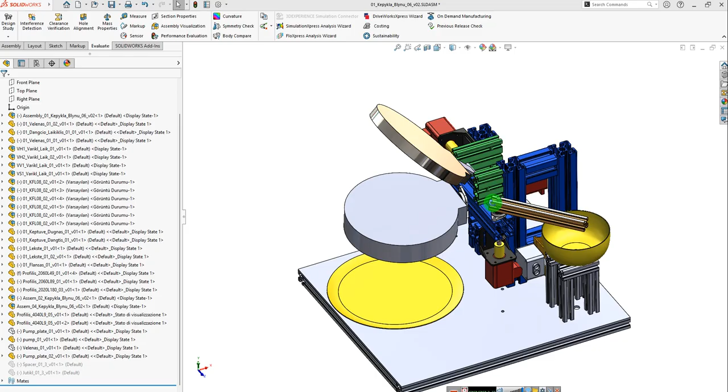So now we need to start from the very beginning the 3D model project for pancake baking. It means you have this mechanism, and automatically it should be closing by itself, automatically switching this position, and here the harness going to the pump, the mass into the bottom part, and the mechanism goes back, closing, baking for a particular time, opening, rotating, and placing on the table. So this should all be going automatically.

A similar model was done before, but it had a very bad view. So 2 months ago I started this project, and from the start we need to prepare a better view. It means everything from aluminum profiles.

So the question is how we need to solve it. Everything is connected with special connectors, here you can see it's simple. The motors here - I'll use another one in 2 weeks for the full design.

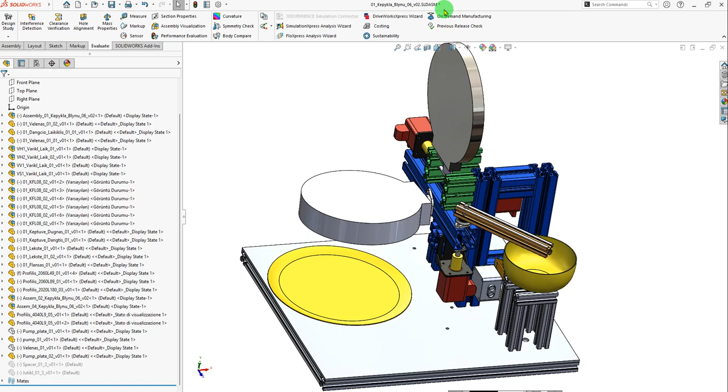So if we're measuring, this will be 20 by 20 millimeters, and the size of the plate, if you open the plate, is 400 by 450 millimeters. So that means we can start a new part.

For the beginning, creating the plate. Example, choosing the top plane, click to the sketch, and we could draw the form like this four edges, rectangle, and place the measurements directly.

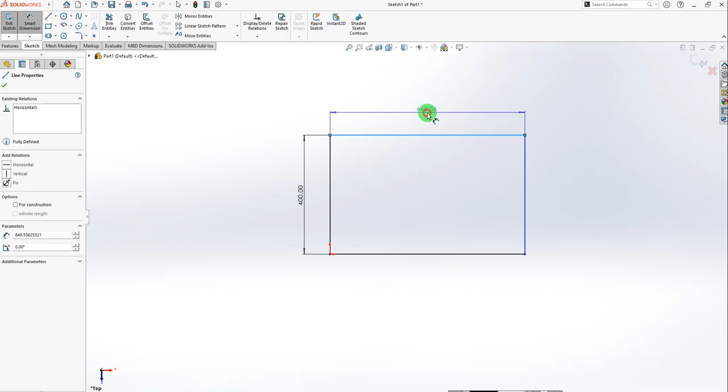So placing the left side, 400 millimeters, 400 and enter, placing the second one, 450 millimeters.

So this starts the sketch, and now we need to do some thickness, extruding, and a good thickness is 3 millimeters for the aluminum plate.

So now you see this plate, and now we're saving it with a new name - we're starting from the very beginning. Okay, Plate 01. Next, we need to add the aluminum profiles, 20 by 20, at the bottom side.

So for creating the plane, for creating the sketch, we need some time for that. If you look into how it looks, but we could do something else.

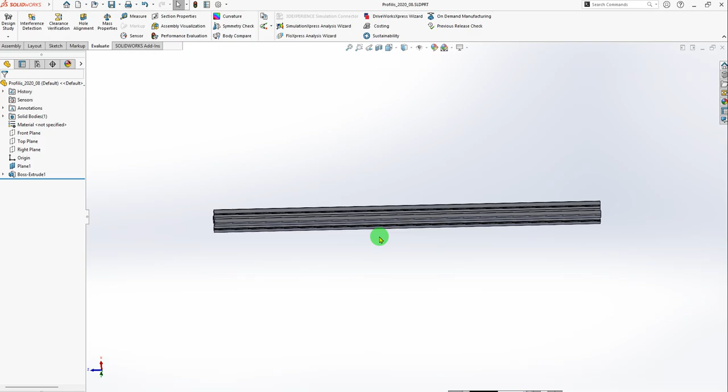Example, if we're opening this file, opening the sketch, how it looks - you see I need some time for drawing it, but it's not necessary if I can find this sketch somewhere on the internet.

And now directly we're trying to find it, opening the internet browser and searching. I know that it's profile 2020, and it's made from aluminum. And of course I need a SolidWorks drawing, so trying to search for it.

So SolidWorks and download. Searching where we could find it - maybe here, maybe here. So aluminum now, okay, trying to search. GrabCAD, yeah, I use this sometimes.

So the similar profile will be faster if I download it directly - I could connect. Okay, go to the library and search. Example, profile 2020, 20 by the x-axis 20 millimeters, and by the y-axis 20 millimeters, 20 by 20.

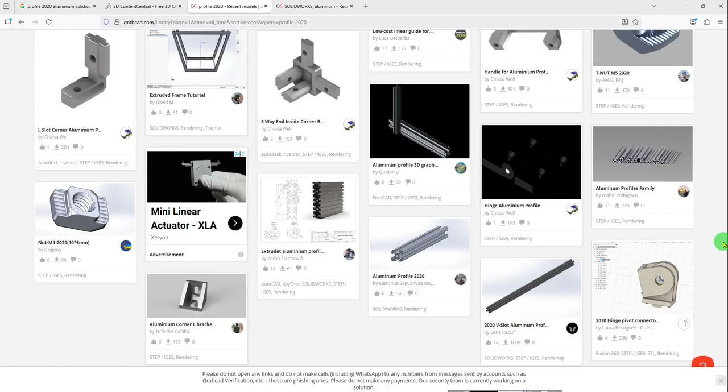So now we can find it. There are different holders for this profile, and we could search directly for this profile, aluminum profile 2020, for example. Oh good, it is enough.

And we need to check if the format is designated for SolidWorks. SLDPRT, it means for SolidWorks. Click to download. Preparing, waiting some time, and it downloads. Okay, we open this now.

File - I'm going to this place to put it, now unzipping, and we have this file. Now we need to open this file in the SolidWorks software.

Closing the old document and opening this part. Okay, I have the aluminum profile on this - opening directly.

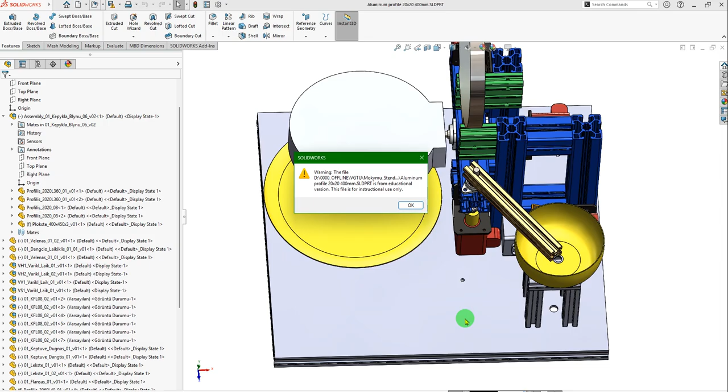It shows that it's made with the educational version. So now we see that we have this profile, and if we look at how it's drawn, it started with this form, after cut it, fill it, and cut it, and so on, and at the end you have this profile.

So the best choice is if we save or name this under another name - that's better for us. And we could save it, for example, as bottom 2020 01.

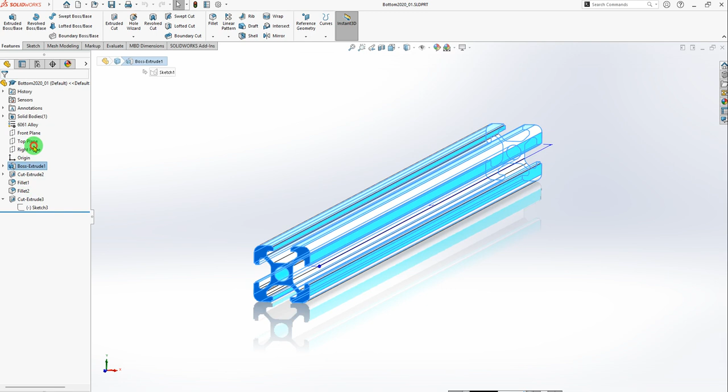Now we need to check the length - this could be the full length. We have 450, the biggest one, length, and we could change the length by our needs, to 450. Assign it and save. So now we have the plate and created the part for the bottom, the bigger length.

So what's next? We need to create the assembly file - make assembly.

So now if we open it, this two parts here, you could click on the left side on the menu and place somewhere inside the assembly file. So we have one part. We need to add another part. Insert components, click to assembly, insert components, and choosing the bottom 2020 and 01. Click here and place it.

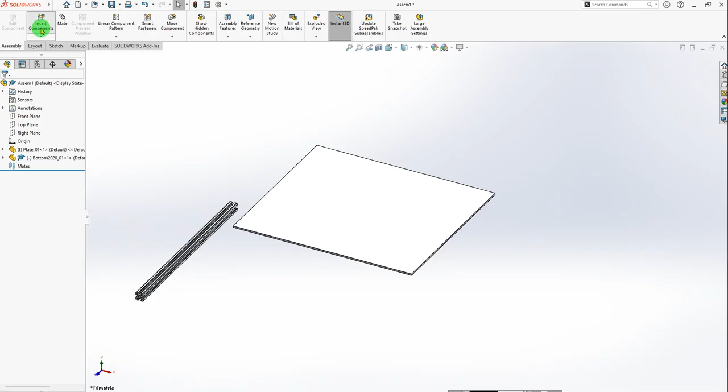But we need to add another one. Insert component, bottom, and we have double this part. Good, we place it here.

Now we could save in this file. This file is assembly file. You can name, okay, assembly 01 in the same catalog. That's okay. Change the name. Rename the assembly 01.

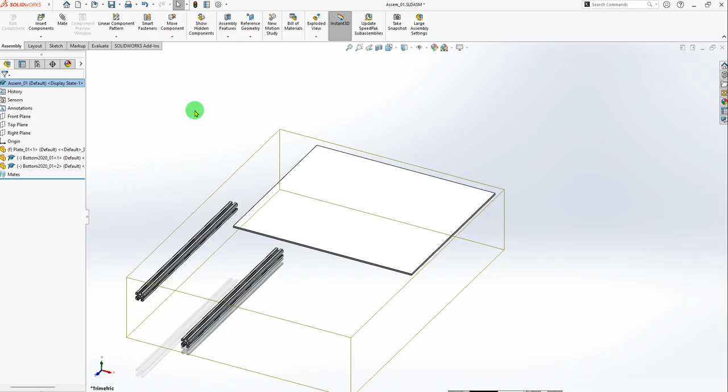So now we need to doing the mates between these parts, and for the beginning we need to click to assembly menu and mate. So now we can choose the bottom part of this plate and top part of this element.

And if we rotating, you see that it's good matching, and we agree. The next it is we need to doing the same with this part, but we could now creating the mates with this. This should correspond the mate to this. Maybe both are here, yes. Good.

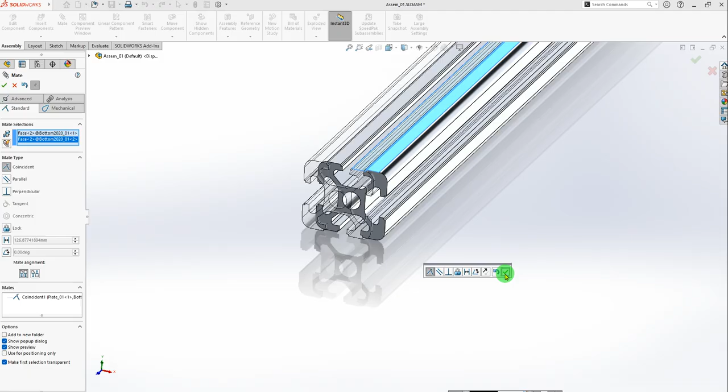And now if we moving one element, as you see, it could be moved. And yes? Why do you make specifically those areas that you pressed? Or is there no difference? Can you just choose whatever area?

No difference. It means you could mating here, this plate side, yeah, you means with this, or separately this, yeah, about that. Yeah, this is not so important, but mostly the same parts I doing. Well, if I need to moving in the future, I need to moving all these parts together. It's better for me. While to outside element, like to the plate, it is only one link, only one mate is done with this.

And I don't need to cutting or breaking the mates with this if I need moving both parts. It's better for me. So now I need doing some rotations and doing another mates. For each part, we need to doing 3 mates always in 3 axes. Choosing another one mate.

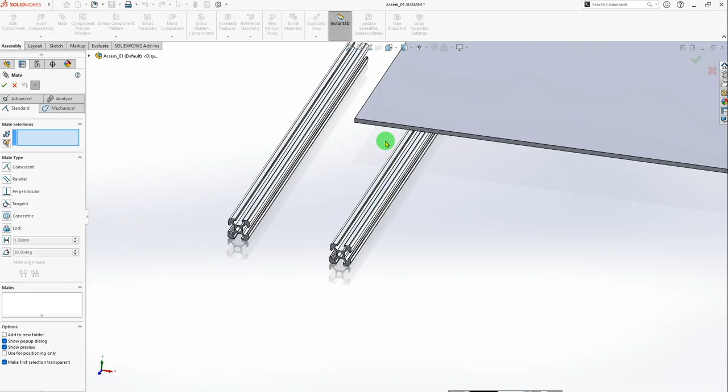And you could mating this side and here, this side of these 2 parts. Increasing, I click to this surface and this. And checking. Is that good or not? So you see, it's good or not. From my viewpoint, it's bad.

I need to rotate it 180 degrees, and well, I choose it this, and this should be on the bottom part. I need to change it, means mate alignment. I click to here, and it changes. So it changes now, and now it's much better. So I agree with this.

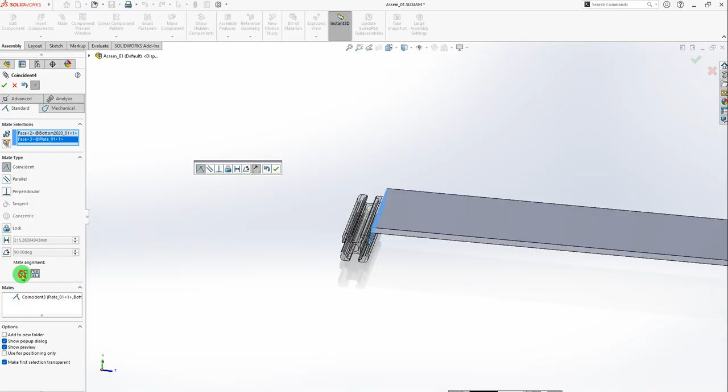The next, I need to do the same with this. And of course, I'm mating these elements between this and this together. But okay, now I could do like this and checking is good or not. Not. I need to change the alignment. So now it's good, the alignment.

I agree with this. And now, if I can move it, so but I need fixing. So I can't move sides, I can't move to the top and down, but I need mate this surface and this surface. So looks good. I agree with this.

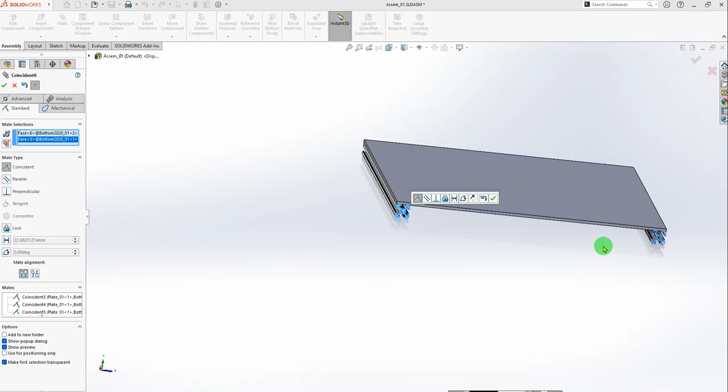The similar I can do here, mating this and this. And now checking everything is good. So the next I need to add another one, but with particular length. And length will be another, not 400. Well, full edge is 400, and we need excluding this and this length.

Okay, if we know the precise measurements, like 20 and 20, it's okay, we could calculate, but sometimes we need to measure the distance between 2 parts, and I show how it will be better to do. Need to click to evaluate, click to measuring, and choose the surfaces between I need to measure it. This surface,

click with middle mouse button, rotating this part until I can see another surface with the wheel increasing, decreasing, and click to this surface. So now I see the dimension, the measurement, and distance is 360 millimeters. So this length I need to create another part.

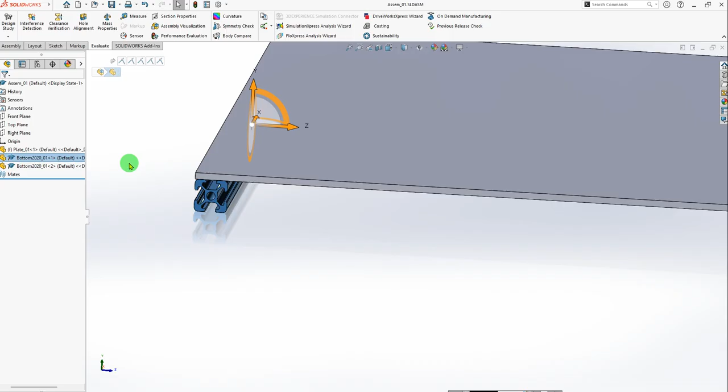Okay. Now I could open this part, click to this element, or I can click here and opening it. I open it. What's next? If I changing the length here, directly changes in the assembly file, the first part.

But I need to saving under another name. And example, I saving, and the SolidWorks ask, I need save this document, I need doing copy and continuing with this drawing, or I doing the copy and open new one part. Mostly I doing the last one.

Click to the third one option, and now I change the name. Example 02, and click to assign. It saves.

So now the question is whether I need to keep the old document or close it. Of course, I need to close it. I don't need the old document anymore, and I leave only the new one.

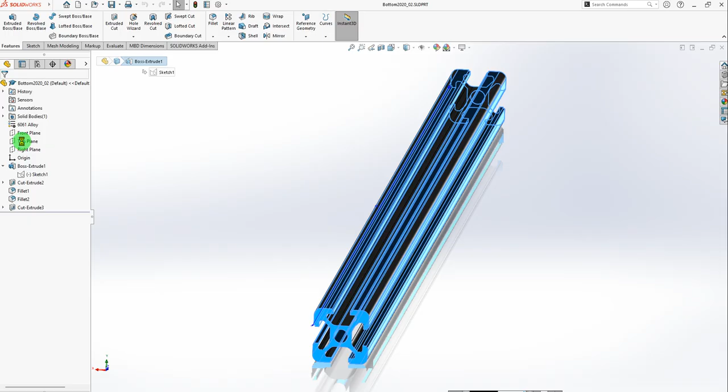Shorter. Now I could save it and open the assembly.

I need to place two elements with another edge. Click to the assembly menu, insert components, and the second one, part of the 2020 profile. Click one more time here, and I could open it again, or do it another way - not clicking insert components, but simply copying the same part. Click here, Ctrl C, Ctrl V. So it's done - second one, in the same place.

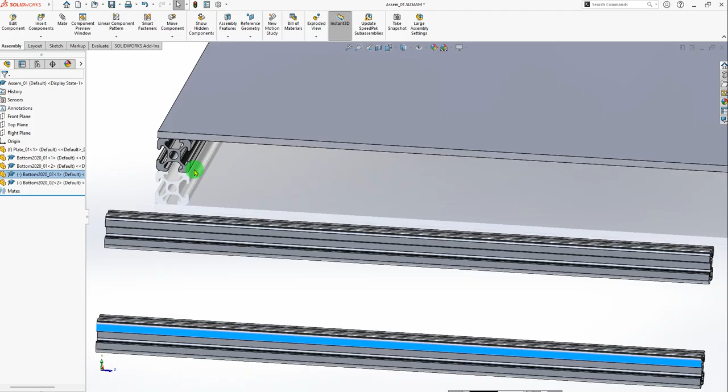If I click here and move, you could see these are two separated parts. If I try to move this element, I can't move it. If I try to move this part, I can. If I try to move this plate, I can't move it. Why not?

The first plate, the first part that I place into the assembly file, is fixed automatically. If you see the letter F here at the very beginning before the name, this means it's fixed by the coordinate system. If I click on this with the right mouse button, I have an additional menu, and I could change the fixation to float. I click float, the F letter disappears, and now I can move all these parts together. So this is very simple.

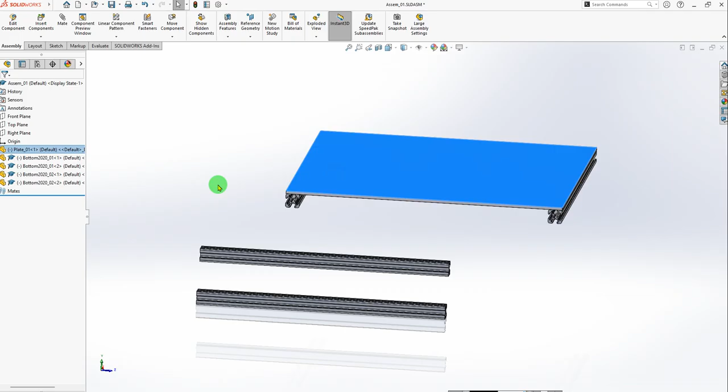If you're placing another element, you could fix everything instead. For example, if you fix this element, when mating, all parts will be rotated around this part only. This part is fixed, I can't move it. But it's not so important at the beginning. Mostly I do the main part, like the plate, with fixation - fixing it. But of course I need to remove the fixation here, float.

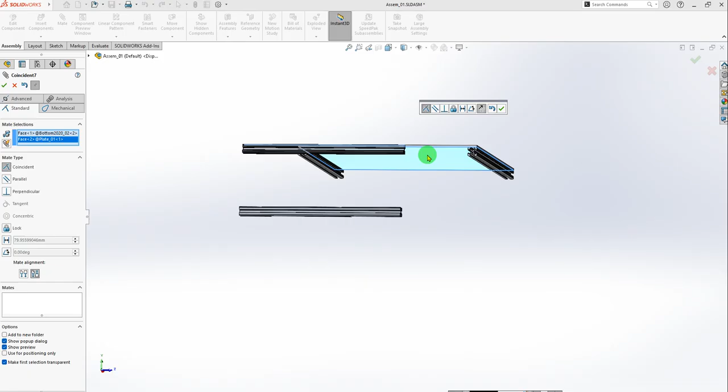So now we're trying to mate these parts. Click to mate. I click one surface of this part with the middle mouse button, change the angle, and mate it with a second surface, mating here. Then I need to check if it's good or not.

Looks good. I agree here or here - it's the same, automatically it's empty, new one. I click here and click here. Sign it. Good. Now I need to...

Create this - I need to choose this surface and this surface. So it's made here, and the last one I need to make this surface with this surface. So now I have a good connection here.

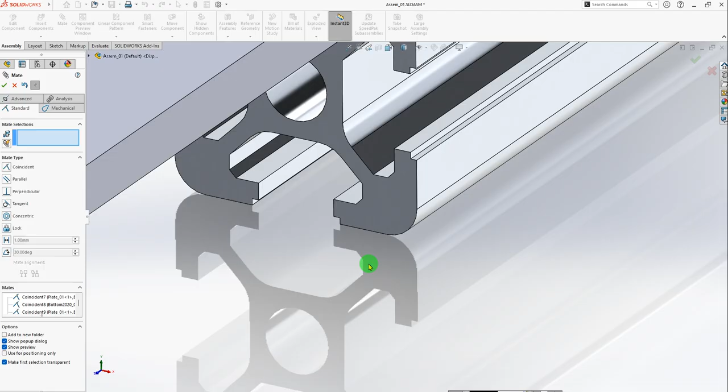I need to place the fourth element doing the same thing. For example, click this surface and this surface. It's placed here. Good, I agree with this, and increase the scale of this surface.

So now we've done the first assembly, but it's only the plate. We need to create another assembly, or place other elements on the same assembly. If we open the old project, we could start with the bigger profiles, 40 by 40.

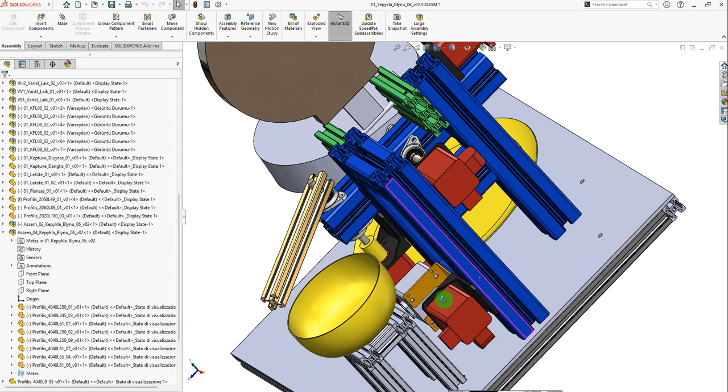You need to find this profile on the internet at the beginning. So we try to search for it. Profile 4040, click this. Oh, there are a lot of elements. But we could download it.

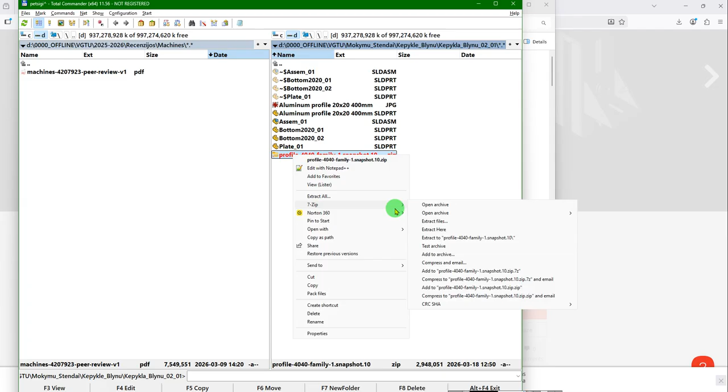Place it in our catalog. Extracting it. And we need to open it and find which part is the right one. We open it through SolidWorks. Click Control O, opening it, and look - so this is good.

This is the one we need to use. Opening it. So we have the profile. Now we need to save it under a new name in our catalog.

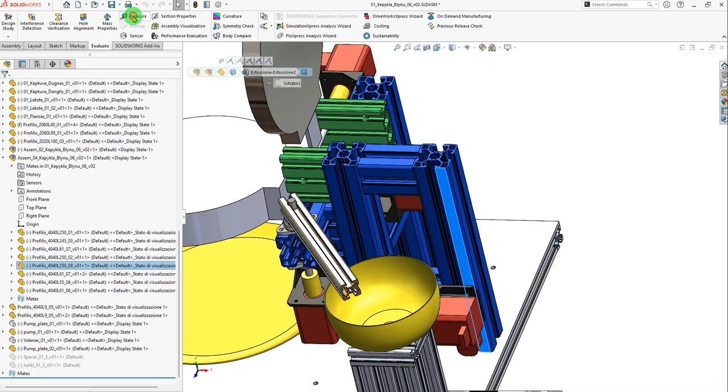Point zero one. So now we need to know the length. This length is, remember, 250 millimeters. We need to measure it - it should show only area and perimeter, but if we click on one edge, for example, it should show the length, 250 millimeters. Good.

Open with Control and Tab another file, and we change the length of this. Click on this element, edit feature, and add the length 250 millimeters. Signing it and saving.

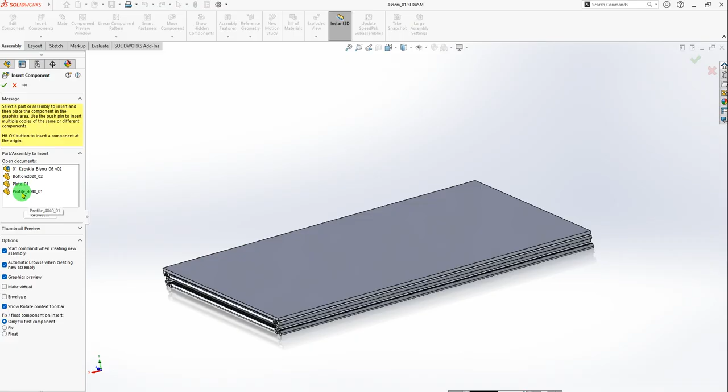So now we open the new assembly, and we need to place it. Assembly, insert component, and the profile 4040. Place here.

What's next? We need to know the place where we need to place it, under this table, on the top of this table. So we need to know the measurements. For the first try, we could click the simple two mates at the beginning, or only one, and after that we need to add another two.

So now we could create the mate, this table part, this surface. Checking, good. And now we could move in this position, but it's always attached to here.

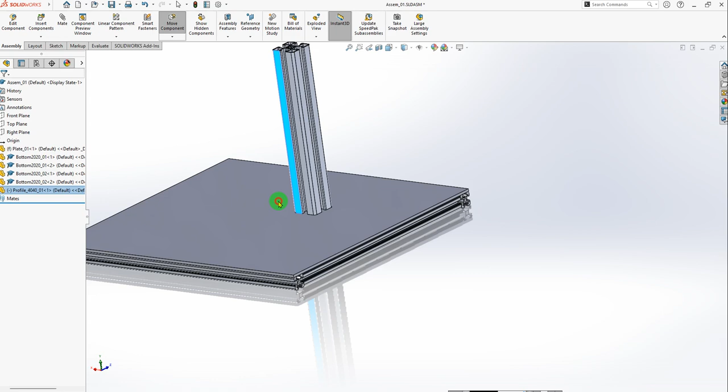That's okay. I click to escape. So now it's good, assigning it. So if I'm moving it, it moves here, but it's always touching this surface.

Good. What's next? I need to place something. For that purpose, the best choice is if I open this plate and place the hole. So the hole in this plate.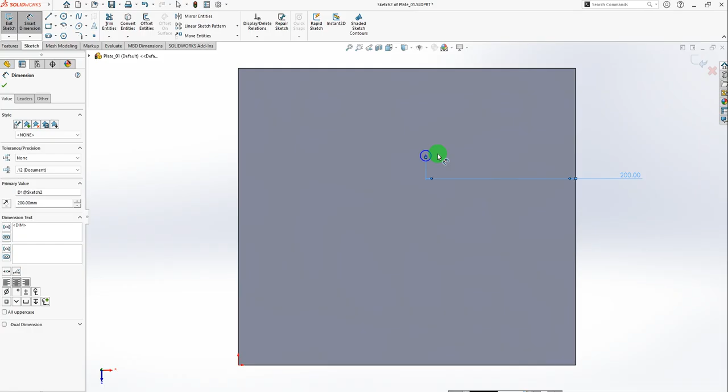Example, I click to the sketch, choose this surface, and place somewhere the hole. It's not matching which diameter we have, but we need to measure here the measurements, adding measurement example 200, and example here 100.

So good, now we can click to the feature and click to extruded cut. So now we could see the feature, and the best choice is if we click to the hole, doing this hole and cutting. So it appears good.

Opening back the assembly, we see here. So it's not okay. I need to see where is the 400, where is 450 millimeters. So we know that 450 millimeters is this element, but I need to change the place.

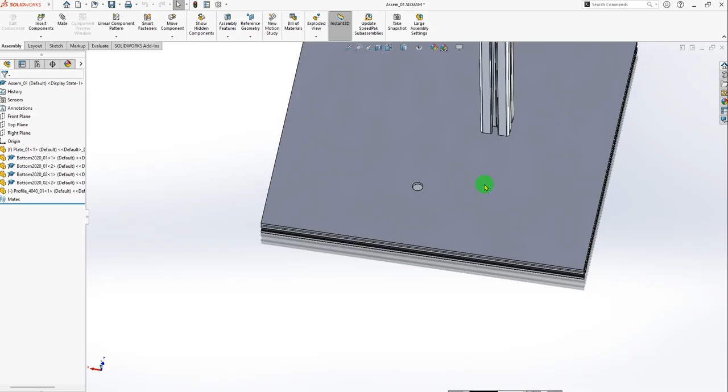It means I need to move somewhere here, and starting from, if we open this, so this is somewhere here, but the place we could check. Click to evaluate, measuring, click here and click here, this edge, and now it shows 179 millimeters.

Okay, we could do 180 millimeters, 1 millimeter is not important. But we see that we need to change from this edge 180 millimeters here, and need to change the measurement maybe from here up to here.

After, so go back, opening this arrow, the sketch, click to sketch, click to edit sketch, and we need to change the position. We're placing at the beginning 180 millimeters. Good.

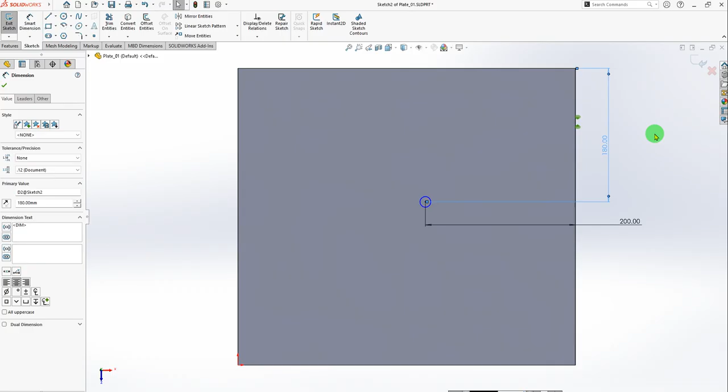What's next? Checking it. So now good, but we need to go to this position, and we need to measure it. Again, we measure it from this surface up to this surface.

We have distance 111, and of course we could reduce 1 millimeter, and it will be 110 millimeters.

Okay, opening this part, and we need to place not here, not there, but we need from this side. It's rotated 110 millimeters.

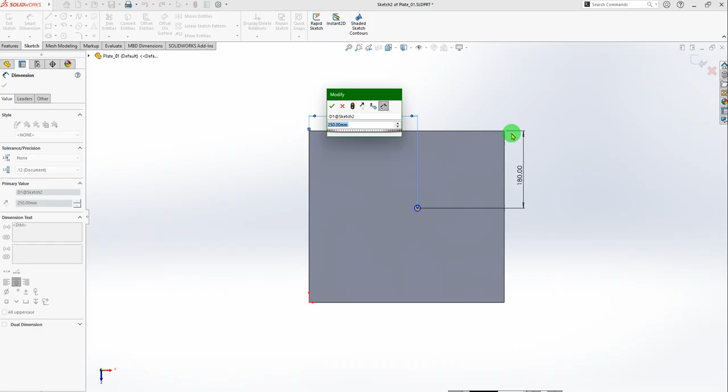Okay, exit sketch, save it, opening this. So now it's much better.

Good. What's next? We can place into this hole position the matching or the axial position of this element. If we have here a circular element, it's the best choice. Okay, we could check it.

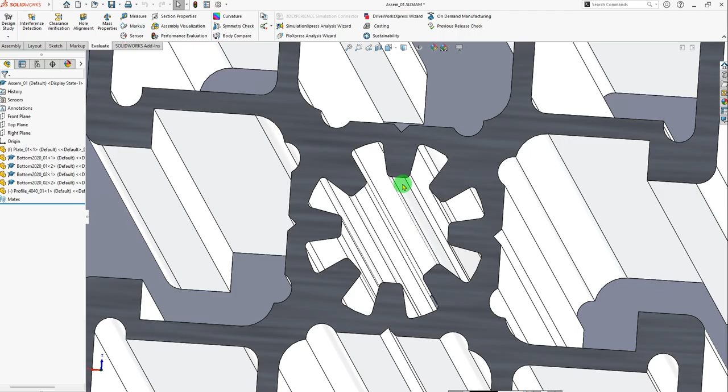Yes. And then you change the hole dimensions for the resource? Yes, it also moves the part, the position changes. If we change the position on the plate, this hole, I will show to you.

Okay, so now we're trying to mate it. We don't know exactly if we have the circular element here inside or not. We don't know that. Looks like circular, but it's not clear now.

So we could check. Simply click to the assembly, mate, click to the hole here, and try to click somewhere here where it has a circular surface. If you see that concentric assigns automatically the mate, it means this is a circular surface, and it's very well done.

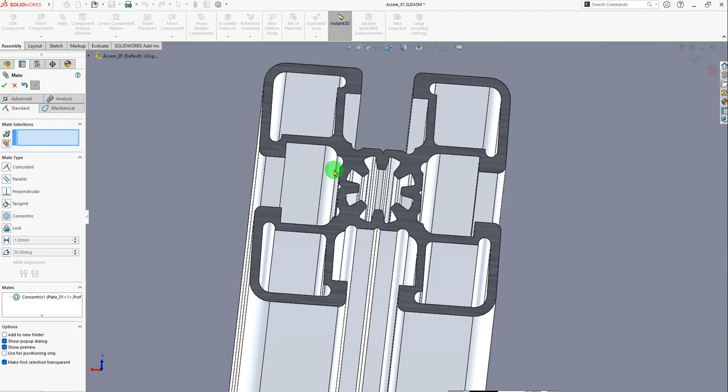Good, I could assign it. So now you could see that in the same position that we need, it's placed, but we could rotate under this axis.

How? Change it. So we need to mate the surface. The third mate we need to do for this, while we have only two mates before. We have the cylindrical to this axis, to this hole, and we have on this plate the bottom part of this profile.

Now we need to add the third one. Third projection, third mate. How are we doing that? We are choosing this surface example and this surface. And what happens if we click to coincident?

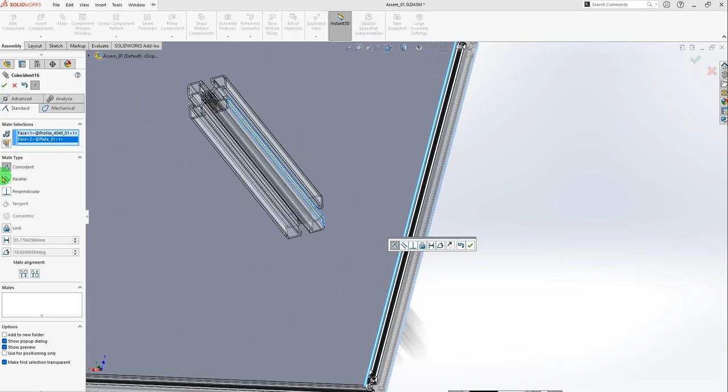We have the error. Well, we have placed the mates in this hole. But automatically the system chooses it parallel. I agree with this choice, and we could assign it.

Now we can't rotate, but we can move. Good, save it. What happens if we change the position? Of course, I see this is too small a position. I need to move to the left side if we open the older one.

No, sorry. I measured, especially from this surface up to this surface. This is the simplest example to measure. It's much more difficult to measure the average, the middle position of this.

I don't have the middle element, but I know the measurements. I measured between this surface and this surface, and placed the hole between this surface and this surface. And I need to add 20 millimeters to this position, 20 millimeters to this position, to the center.

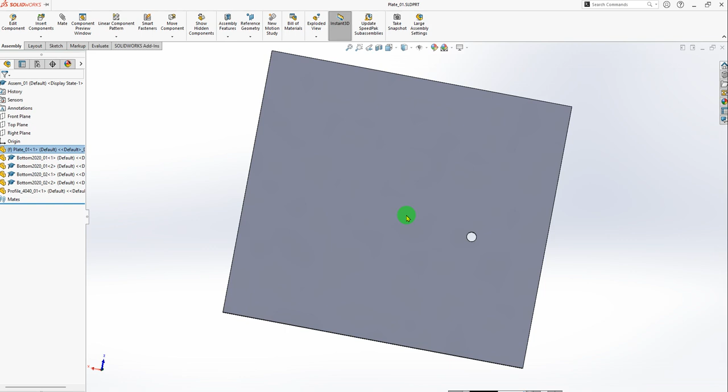Now I could open this plate and try to add 20 millimeters. How could I do that? Changing to 130, yes? Good. But it's another question - one time I'm changing like this.

130 millimeters, click enter, so it changes the distance. Next, I saw I need to add additional 20 millimeters, but click 2 times to this element, and I could add 200 millimeters here, changing it, or I can do the mathematical function, plus 20, and click enter. It automatically calculates.

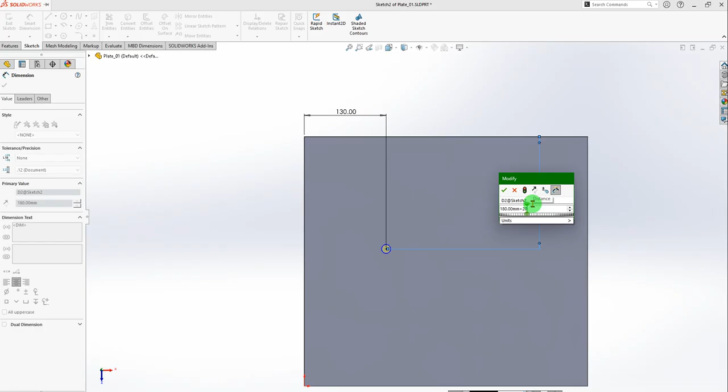This is important, sometimes it's difficult to remember if you have 4 or 5 numbers in the value. Or sometimes you need to divide by 2, multiply by 2. You need to care about it and calculate very precisely. The best choice is you could add elements - plus, minus, divide, multiply, and so on - and assign it.

Good, now exit from this part, go back to the assembly, and it automatically moved. This part moved 20 millimeters to the left, 20 millimeters up, by this picture. So good, next we need to add 2 additional elements.

We need to check if it's the same length or not. Of course, this is the same length. We could see this and this additional. Now we placed this part, and we need to add this and this. But it's the same length, it means it's the same part I could add.

Ctrl C, Ctrl V, and again Ctrl C, Ctrl V. I have 3 parts. But all these 3 parts are in the same place.

If I don't know how many parts are here, sometimes not just by clicking Ctrl C, Ctrl V, copy, paste - but sometimes if I'm inserting components, placing them, for example, 2,000 or 30,000 millimeters away from this part, I don't see the part.

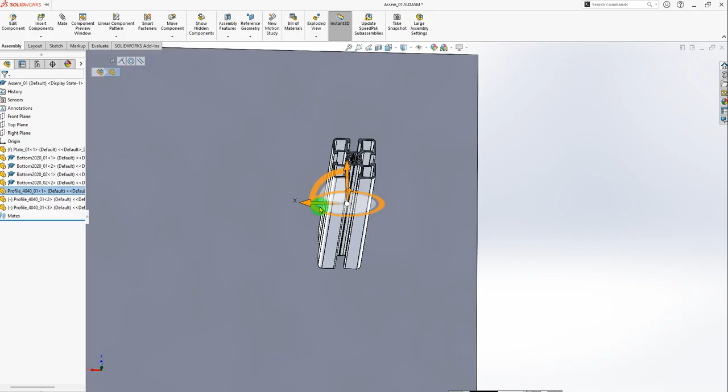In SolidWorks, there is one beautiful button, F. If I click the F button, it automatically shows all parts in one window.

The part marked here, I could move by these arrows. Here, that direction. And the example I showed you - if I move this part somewhere here, and I don't know where the part is placed, I see this part is here, the center.

Click here, I don't see anything. Of course, I can increase or decrease, but the best choice is to click F and show the part. This - all parts shown on one screen. And I can move. It's easier to recognize and understand.

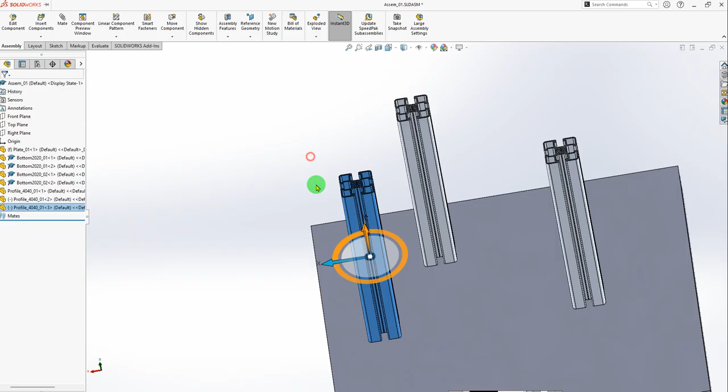You change the position, the height. Click this part, I see the positions changing. So I have 3 parts.

Good, now I need to place 2 parts here, but I need to measure the distances. Now we could click evaluate, measuring, and measure this and this distance. And I see a few measurements.

Normal distance 61 millimeters. Good. By x-axis, by z-axis, by y-axis - it shows everything. Good. So it means 61 millimeters. Good.

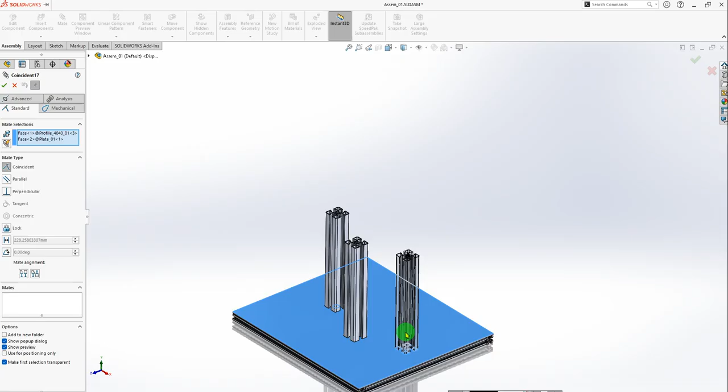Now I'm rotating it, and I need to place it 61 millimeters away. Assemble, mate. At the beginning I place it on top of this surface, mating this and this. Assign it. Now I can mate this and this.

Not this, false. Where is my... I can move this, I can move this, but I can't move this. This is placed fully. Okay, I need to rotate, maybe for better understanding, to mate directly with this picture.

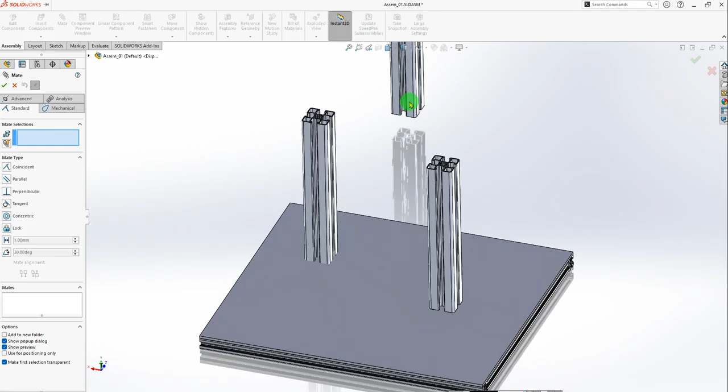So, okay, let's do the next point. This I could move somewhere, but I'm doing the mate. This and this mate. Good.

Next, if it's placed, for example, one onto another part, it's difficult to know which part is placed and which is not. But the best choice is if I click here on the left menu and see the arrows, I can try to move it. I click this - not this, I need.

I click this - to this, you see 2 parts are in the same place. But I don't know which is placed, which is not. I try to move it. I can do it. Good.

It means this isn't the part I need. I need this part, okay, this part. I try to move it - yes, it moves. And now I have the mates.

How many mates do I have? 1 or 2 of this part. If you don't know, we need to open the list. Click on this element here or this element here, and click view mates.

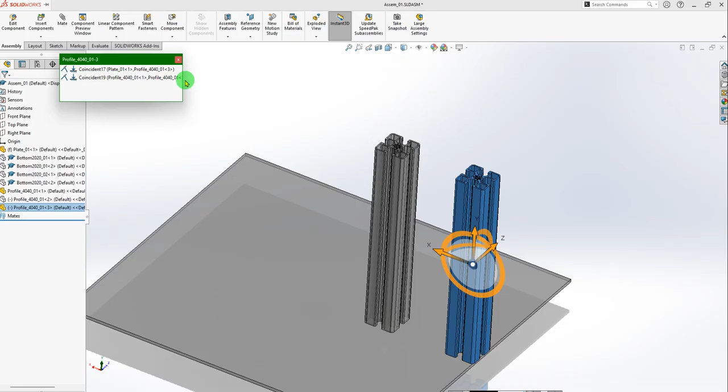And I see now we have 2 mates. Simply moving the arrow to the cursor, I see that the pictures show this bottom surface of this profile is mated with this. You see the different colors. And I move to another one, it is mated here. This is good, it means I have 2 mates.

And I need to do the last one mate, between this and this inside. Click here to the distance and write 61 millimeter. And assign it.

So now I could check. If I open view mates, I see 3 mates: coincident, coincident, and distance. And it shows between what parts the mates are placed.

Good. The next, what I can do, I can place this element parallel to this surface, and I need to know only the distance. The distance we could measure. Click to evaluate, measuring between this and this surface, and we see 71 millimeter. Good. Click to escape.

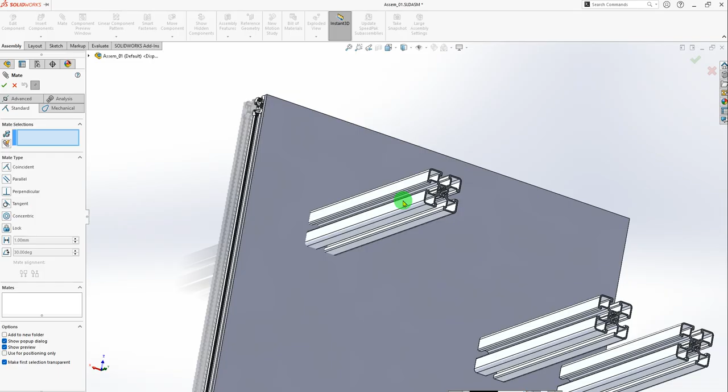Reopening the older documents, and click to assembly, mating, and now mating this surface and this surface. It's good made. If it happens that mate is not so, but like this, it means you need to change the mate alignment. It could happen, about 50% don't match the alignment, while the system automatically should.

Good. Now we assign it, and we need to move this part. Click to this part, move part, and we need to add the distance between this and this surface, 71 millimeter. Click to distance and 71, enter.

Good. And how many mates we have here? This profile, 1, 2, or 3. If we try to move it, we could understand that it is not fully mated.

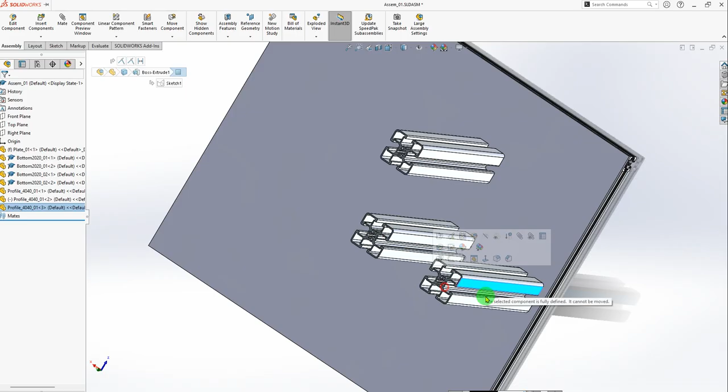If I try to move this, I can do it. If I try to move this, I can do it. Try to move this, and so on. The best way of checking the mating elements is to try to move it. Click with left mouse button and try to move. I can do that. Good, it means I need to do the mates.

Now I need mating the bottom surface of this profile with this plate. Okay, click to mate, click to this surface, and how can I catch this?

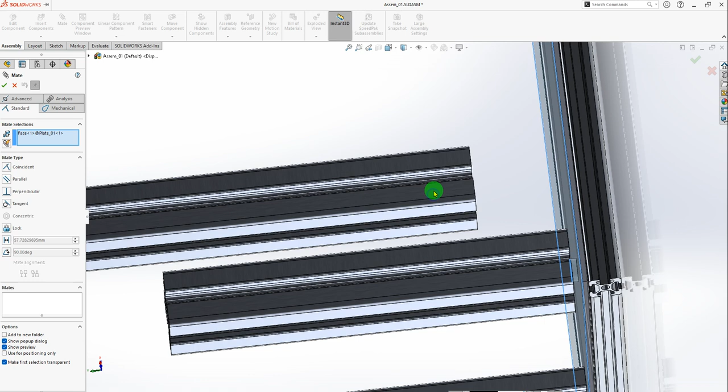If I don't see if it is inside placed, I can move this part. I can click with this element, so, and I could check, try to move it with the right mouse click. I can move this part, and I need to choose increase the scale and click to the surface and check it. Good.

Now we positioned well these 3 elements. The next, what we need to add inside here: 2 elements, the same length, on the very top and not at the very bottom, but at some distance. We need to create 2 parts with the same length, and the length was 61 millimeter between these 2 surfaces.

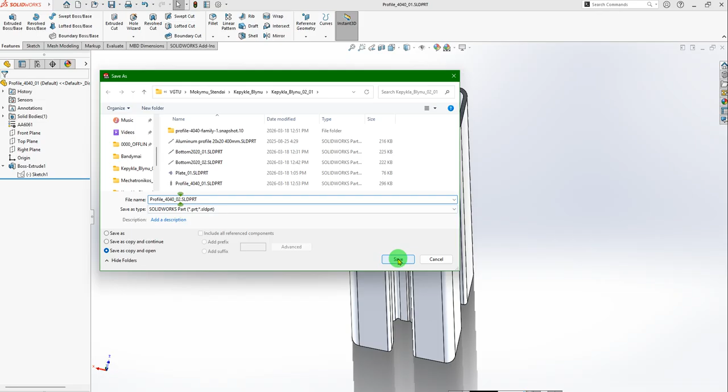Okay, now we go back, open this part. From this we are saving as another part. And again click to the 3rd option, and we could use the 02, the name, close the original document, we need a new one, and now we need to change the length.

The length should be 61 millimeter. 61, enter. Good. Assign it, save it. Go back to the Control and Tab, or the same as here. We could choose our assembly, and we need to place somewhere here. Insert component 02, place here, and one more second part here.

Good, we have to. What's next? We need to add in some mates, at least 3 mates for each part. Here, here, and the bottom, the top, sorry, surface example, and we need to check if it is good or not.

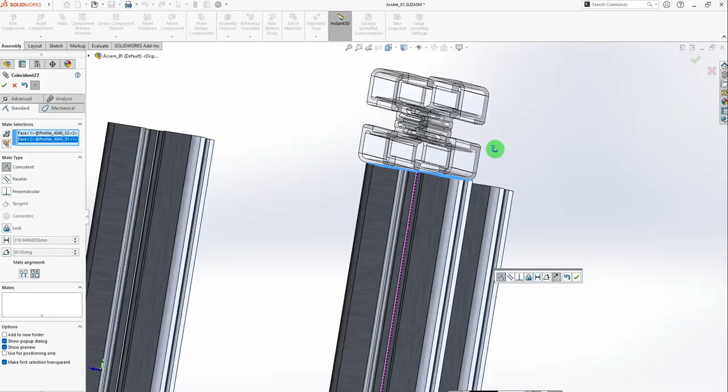Not good. This should go inside, between this. We need to change the alignment. Click here, it changes. Good. Now I agree with this alignment.

The next, I need to mate this surface with the nearest this surface. Check, good. And the last one, I need to make this surface and this surface. Good. Now I can check, if I try to move, I can't move. It means fully positioned, fully mated.

If you fully mate the elements, you see the minus symbol disappear from the very beginning of the file name. If you see this part is not fully mated, not fully placed, not fully positioned, there is, yes, the minus at the very beginning of the file.

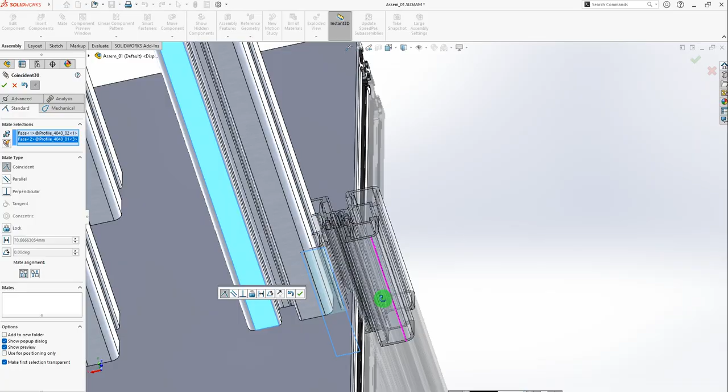So we need to mate this. To mate, click here, and here. Check, so I agree with this. The next, we need to mate this and this surface. Good, looks not bad.

And the last one, I need to check the height, where I need to mate it, and I need to measure it. Example, click to evaluate, measuring from this surface up to this surface. Can't catch it.

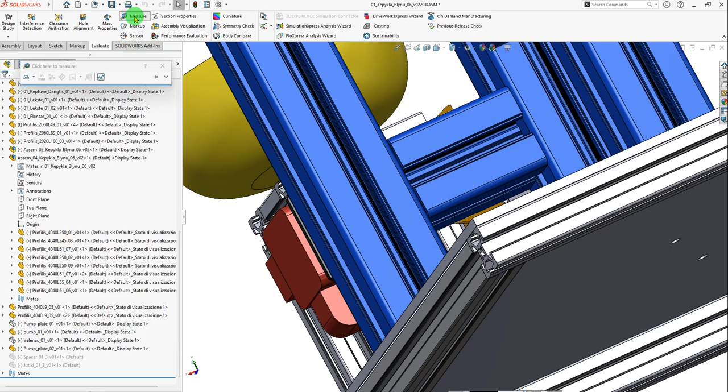Okay, again measure now it's good between this and this. And I see the distance, yeah, it's not even, but of course we could change it. 44 millimeters.

Open this file, now assembly, mating, rotating so we could see the bottom surface, click to this surface, and click to this surface. Distance is 4 millimeters.

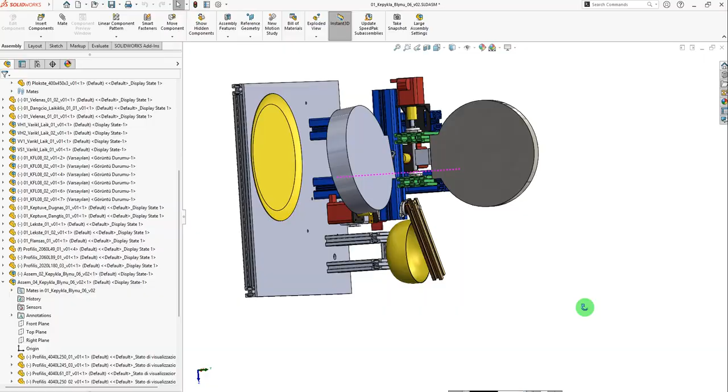So now mated this element. Next, we need to create a new element between these two parts. Between these two parts, this element is placed inside. We know the length, the distance between two parts is 71 millimeters. We need to add one element of 71 millimeters.

Open this. We could open the last one element, saving under another name, example 03. Close the original. So now we need to change the length, changing the length to 71, enter. Assign it and save it.

Good, now opening the last new assembly, and we need to place here inside. Insert components, profile 03, place somewhere here.

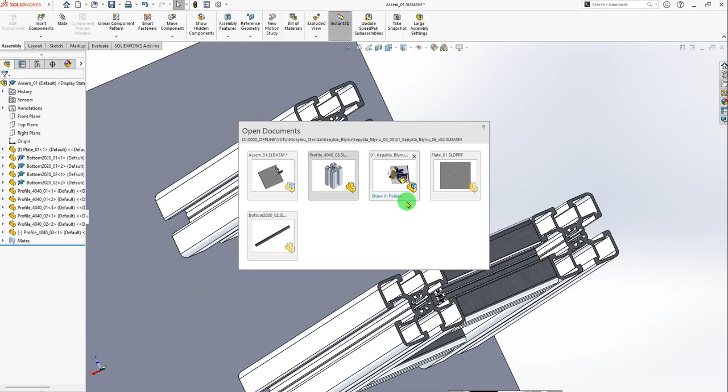It means the part length we need to change by our needs. For example, I'm measuring directly. Well, you could do it here, but it's still the same. You open it the same way from the assembly file, opening the part, and you could measure the distance here, but showing it separately is simpler to understand.

Directly here you could open. You could open edit part directly in assembly, or you could open the part separately. If you click to edit part here, you see the whole assembly, like it's clear, and you could change directly. It's the same as doing it separately.

So you could change it, but I'll show that it's not fully designation - 71 millimeters, simply changing. And we need to exit here, exit from the editing of the part. This is still the same.

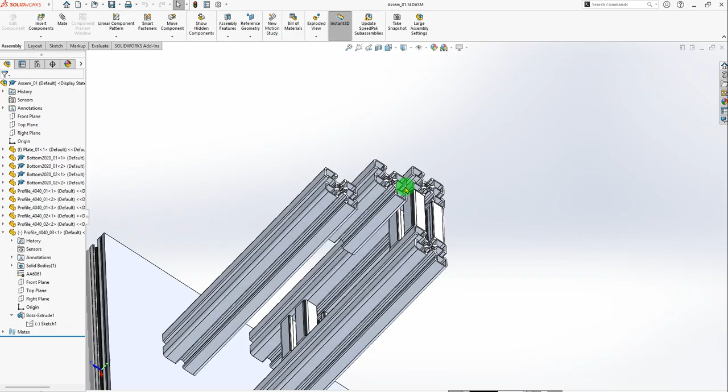So now we need to mate it, mating this surface with this surface. Good. If I need to move, we could move it. Now I'm mating this surface with this surface, and this surface with this surface.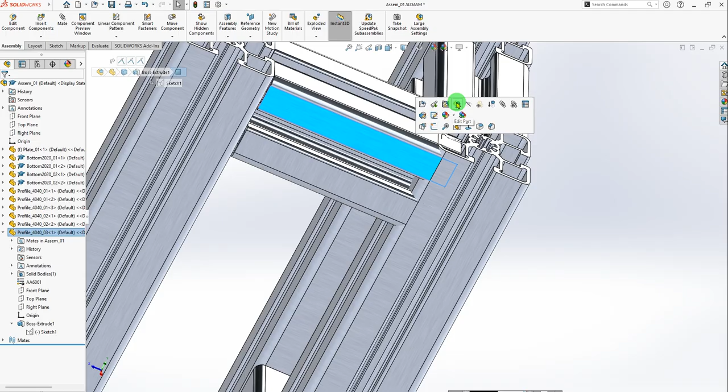And we're changing, okay, minus 10 millimeters. So now it's a good position for the part. I try to move it, I can't move it. And this minus symbol appears at the very beginning.

So what's next? Next I need to add another long element. You see, now between these two parts there's only one, but from the side this element is placed. So we could check the length of this, click to evaluate, measuring, and click to the one line. The length is 245.

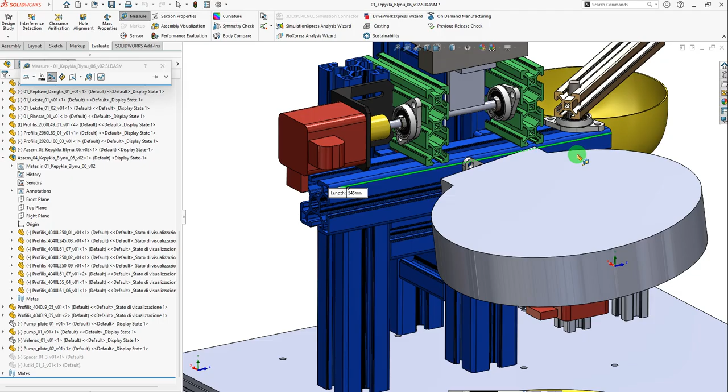So now opening all the parts, we can save under another name. We need to have another length, 04, and save it. Close the original, and change the length to 245.

Good, now I'm opening the new assembly, and I need to place here assembly, insert component. If I don't see it in the list here, example, okay. If I don't open this part, I'm closing all parts. Closing one part, I have the old assembly and the new assembly.

I need to place this part, but I need to know the name for that purpose. Insert component, and in the list I don't see this. Of course, I need to click to browse, and from my catalog I need to choose the parts. So I need to know which one, what the number is - of course, the last one. Opening this and placing it here.

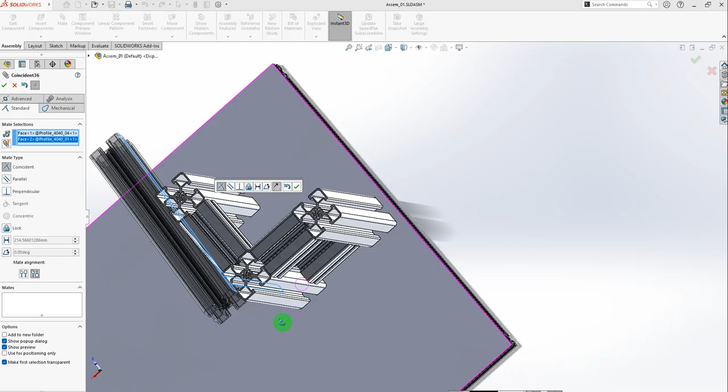What's next? This mating with this - what happens? Also wrong. I need to move it. The best choice, click to parallel.

It means you could move, or click to the distance, and you could move this edge apart by like 50 millimeters. So you see it's the wrong direction for distance - you could click to flip dimension. So now it moves to the other direction, and we rotate from the top view, so it looks good.

So we need to position it. I don't know how many millimeters should be placed here. I placed 50, but of course we need to measure it.

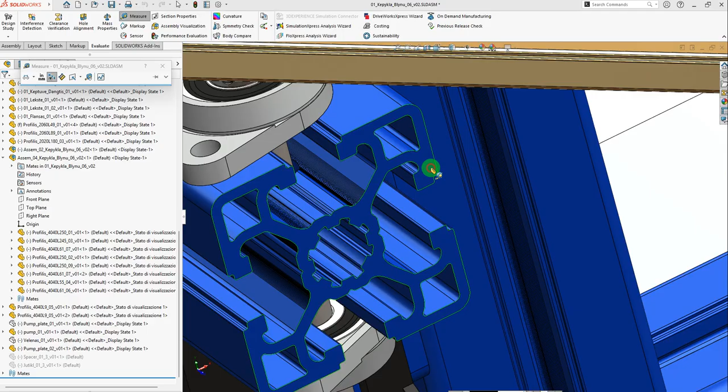So from this position we need to measure between this surface and this surface, the distance. Click to evaluate, measuring this and this, rotating, so I see this dimension: 49 millimeters. Okay.

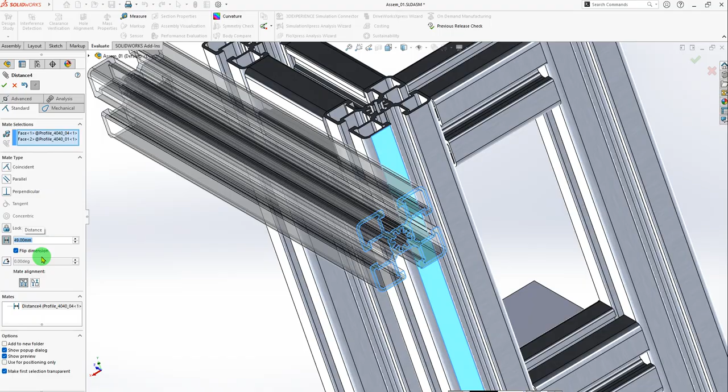Open this. Now I need to find this mate. One possibility, I can click here. I have two mates. Another possibility, I can click all mates and try to search it. This goes by the order, the last one. I need to edit the feature and change this distance to 49. Good, it moves 1 millimeter.

So next, I can move up and down. Again, I need to measure the distance from the old assembly, from this surface, example, up to this surface. I see the distance is 150 millimeters. I can move by needs, sometimes into the same place, placing 3 or 4 measurements. You could move with the left mouse click. 150 millimeters. Good. Click to escape.

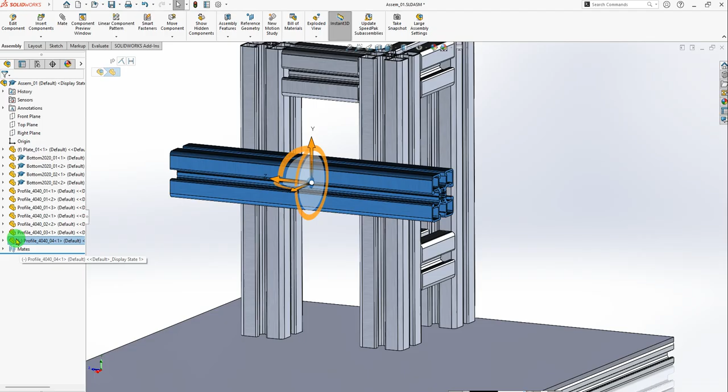Now we need to mate it 150 millimeters between this surface and this surface. Assembly, and you go back, and you see now this one with a minus, not a fully mated part. You see the minus symbol. Click to mate between this and this surface.

So automatically it created the mate type coincident. You could click to parallel, perpendicular or other, but you need to have distance: 150 millimeters. Enter. And assign it. Good. Now it's much better.

What's next? So we need to add the fixing elements, the fixation elements, and the caps at the ends of this part. So we downloaded the SolidWorks files for the profile 4040, and here inside it is the cap.

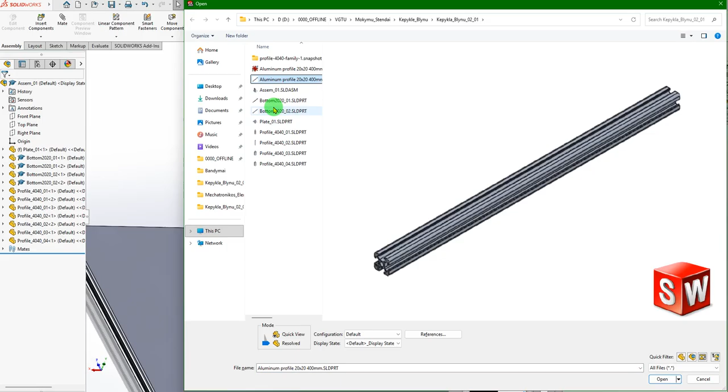How we could see it, the best choice from SolidWorks, opening Ctrl+O, and check where here profile, where is our cap. Here, not this, not this, not this. Checking this cap. You see, good, we're opening this cap. Now we could save it under another name and place it in our home catalog. Click to this catalog and name it cap 01 or cap 4040.

Good. Now close this, and we need to place everywhere we need to add the caps. Insert components, browsing, and search with the cap. Place here. Good. How many caps do we need? 1, 2, 3, 4, 5 caps.

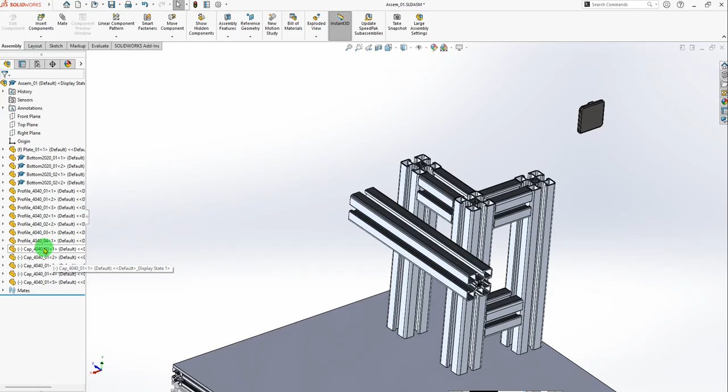We could click here and do 4 times Ctrl+C, Ctrl+V. 3, 4, and 5. So now we have 5, but it's the same - all has the same measurements, the same sizes. But now we need to place them in the right position.

We click to the mate, click to one surface then another surface, and check if it's well positioned or not. Now we see here is good, but here not good. We need to change the alignment. Click here, alignment. Now it's much better.

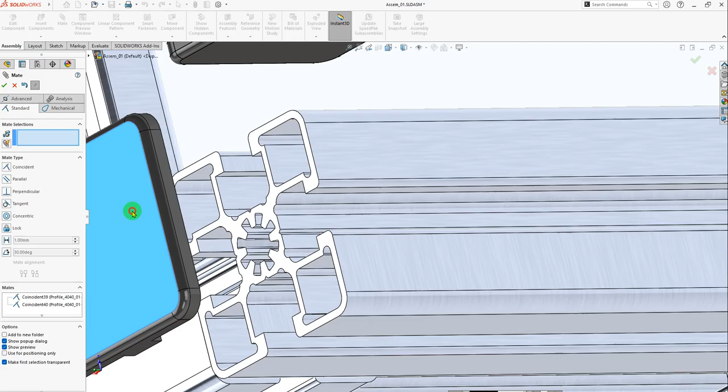The next one, mating this surface with this surface. So not bad, but we need to add an additional mate. We could, with the mouse left button, move it away and click to this surface and this surface. So now the cap is fully mated.

We could try to move, but we can't move this - and the minus sign disappears. The next cap, again we need to mate in the same way. There's one surface here, one surface here. Changing the alignment, so now it's good.

Now find the surface, this, and click to this. Good, and you need to change the height. The third one, mate this, mating with this surface. So now it's good.

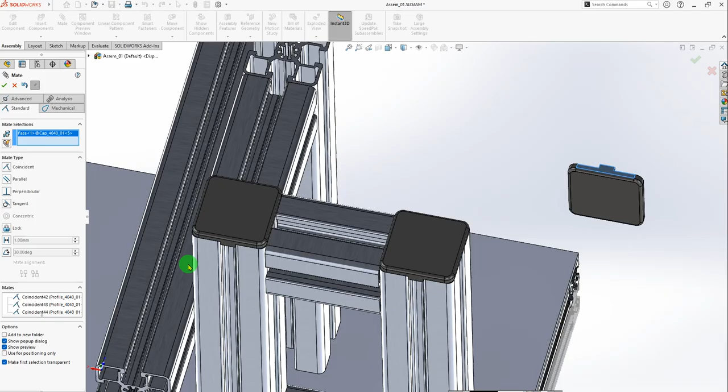Mating another one. This surface, this. Check it again - no, not well. So it's much better. But you see inside, somewhere it's placed.

By needs we could check which one - this is the element. With the arrow we could move it. So now mating another surface, this surface with...

This surface, much better. And the last one, mate this and this surface.

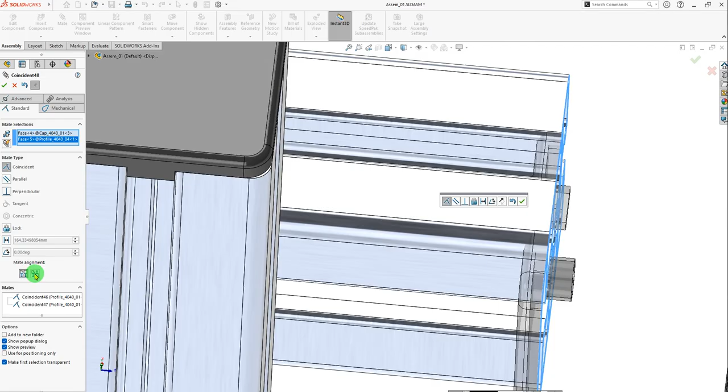So now we have 3, doing another one, this surface to this. So not well, I need to change the direction, changing the alignment. Good.

Now click to this surface and this surface, and this surface and this surface. So now it's fully mated.

And the last one is with minus. You could see, if I can't see, so I can click the F button, all parts appear inside, and mate the last cap. This surface with this. Is it well positioned or not? Good.

Now this surface with this, and this surface with this. Here are two surfaces. If wrong, you could click to this text, deleting it with the delete button on the keyboard, or with right click you could delete.

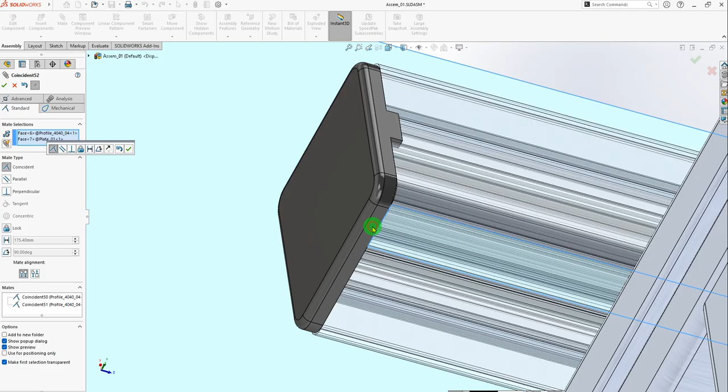Okay, again, that's wrong. Okay, this surface and this surface. So now we see fully mated all parts. So this is for the very beginning.